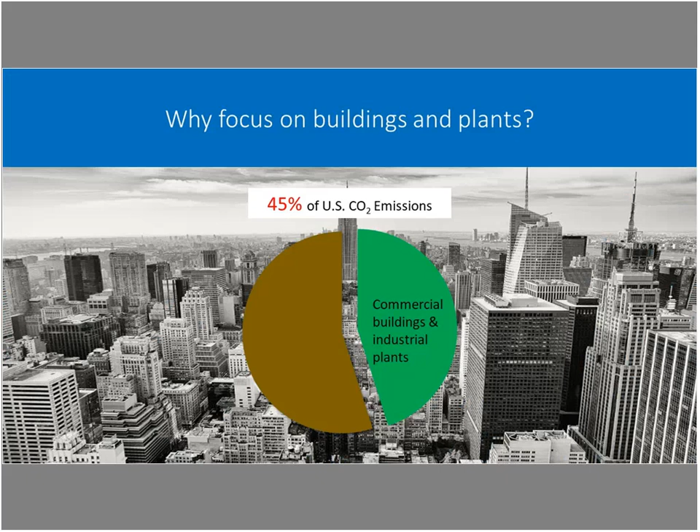And then if you go to the next slide, we also do this work because there is a lot of energy waste in buildings. So that suggests that there's room for improvement. And go to the next slide.

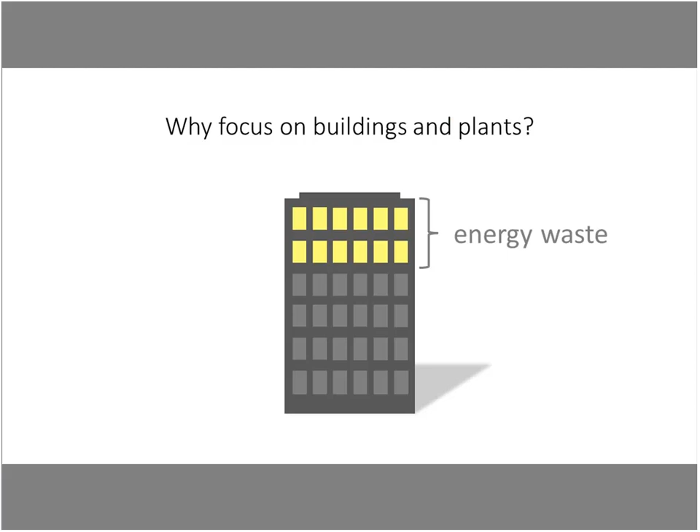And how do we support improvement? So there are 3 main ways as a voluntary program that we try to do that. Those include leadership commitment, so agreeing and engaging with our program, tools and resources to understand and act on energy use, and then recognition for top performance.

So that was it on the Energy Star background. And now we're going to shift gears into building performance standards.

The results of the poll are good to know, so I can try and frame things up for those of you less familiar with these policies or newer to them. So I'll be careful to really define things as well as I can.

So what is a building performance standard? With this slide, I'm going to compare BPS, the shorthand for Building Performance Standard, against benchmarking requirements, which are the predecessor policy to BPS. Those requirements applied to buildings, and they had to report energy use and water use to a state or local government, and then have that information disclosed publicly by the state or local government.

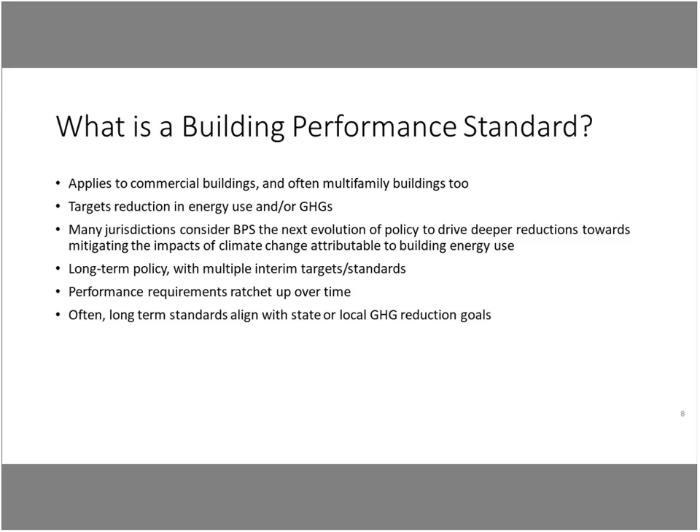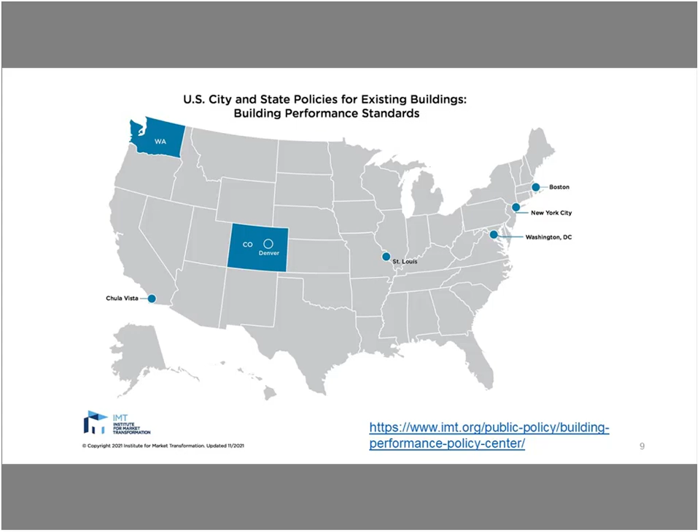Okay, now I want to talk a little bit about some differences among the policies that have passed to date. So among the BPS policies that I just showed, what are some key differences?

The next two slides after this are a long table that goes through all these things in more depth, some of these things. We'll get to see the specific application, but here are some differences in these BPS policies.

There are different sizes and types of buildings covered by the policies, and how properties are defined also differs in some jurisdictions. There are certain standards that buildings need to hit, both in the interim and long term, usually based on the property type. So how you define what type of property a given building is matters for that point.

The time frame also is a difference. Some places have a shorter time horizon, or more or less time between interim standards.

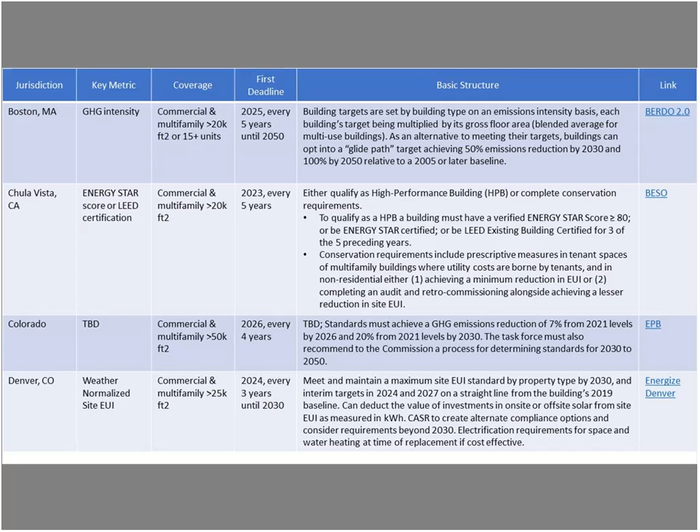Yeah, let's see what else. I'm going to move on, I think, in the interest of time - I know I'm already running a little late. So this is available to dig into, and we can ask questions at the end if you have any specifics.

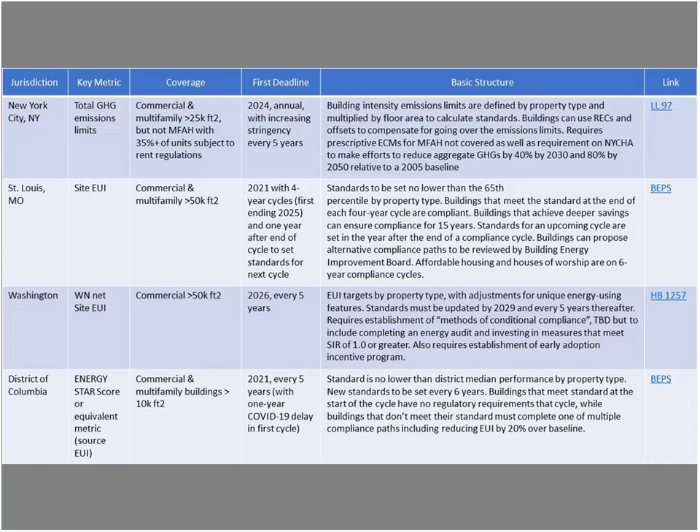So next slide, please. And next slide. The last thing I wanted to highlight was our role in these policies, and with the state and local governments passing them. We have an advisory role on policy design. We recently put out a toolkit that talks through guidance on these requirements, benchmarking, and building performance standards. We also put out a white paper that talks through metric selection for BPS. So both of those things are publicly available.

Another important thing, I think, overall is that we bring the perspective of building owners and managers to the table, to policymakers, and vice versa. So we're acting as a bridge between those two audiences. And one of the main things we are targeting there is consistency in these requirements across the country.

Because we think it will benefit everyone and make these policies more effective in achieving reductions, we also support policymakers on implementation when they're actually doing the work through our tool, Energy Star Portfolio Manager. That's the reporting platform for these laws. And we also have a forthcoming tool called the Building Emissions Calculator.

And the last thing I wanted to highlight was the toolkit that we have publicly available in case you wanted to learn more. It's broken into sections and talks about benchmarking and building performance standards, and it's targeting policymakers. So with that, I'm all done, and I'm looking forward to the Q&A.

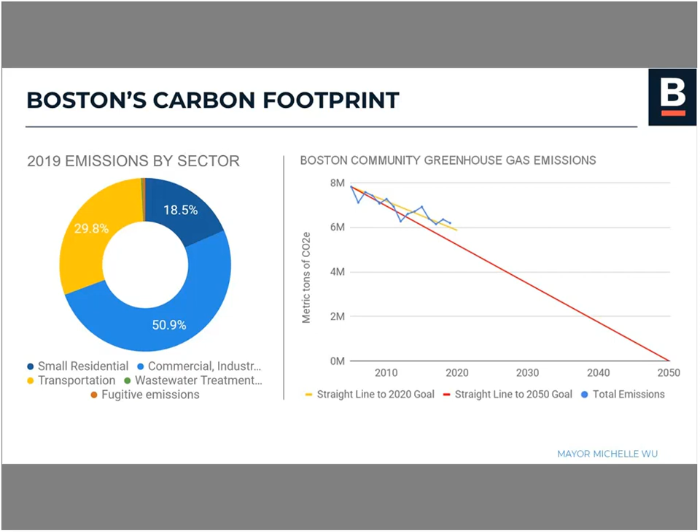In 2019, the City of Boston published an update to its climate action plan, which detailed how to accelerate climate action in the next 5 years. And one of the strategies that was identified as a high priority strategy was to develop a carbon emissions performance standard to decarbonize existing large buildings. So this was putting forward that Boston needed to develop a BPS as just one of the many high priority strategies within the climate action plan.

And in Boston, this idea was building on existing policy. So in 2013, Boston created the Building Energy Reporting and Disclosure Ordinance, BERDO 1.0. You'll notice there's a couple words different - instead of energy reporting, we now have emissions reduction. This was Boston's benchmarking policy, requiring buildings over 35,000 square feet or 35 units to report their annual energy and water usage to the city each year, and then the city would publicly disclose that information. There was also a requirement for every 5 years that buildings would need to complete an energy action or assessment.

So this was already in place, and then the climate action plan was calling for an update to this to turn it into a BPS with emissions reduction targets.

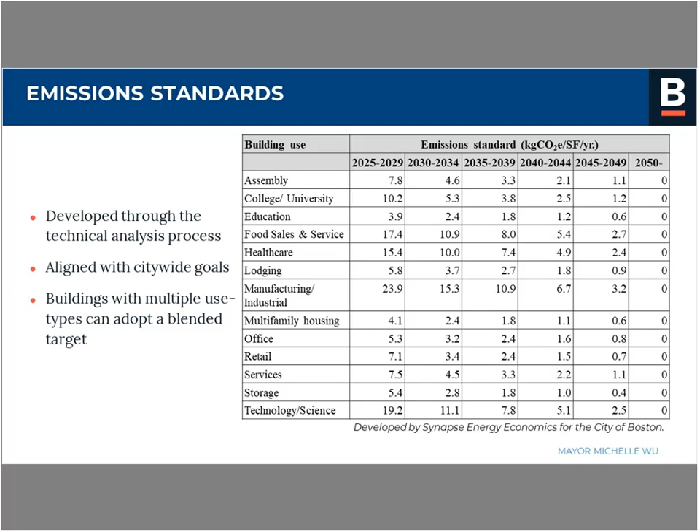Next slide. So I'll just cover a few key features of the ordinance. The first, buildings will still be required to report their annual energy and water usage, as they've been required to do since 2013.

The update expands the buildings that are covered by BERDO and subject to BERDO, and lowers the threshold down to 20,000 square feet for buildings with 15 or more units.

Buildings will have multiple pathways to meet the emission standards. So starting in 2025, that's when the larger buildings will need to first meet the emission standards. The 20,000 to 35,000 square feet buildings will have until 2030 to meet the emission standards for the first time. And I'll talk a little bit more about the different pathways to meet the emission standards in a moment.

And finally, BERDO will be overseen by a new review board. So this review board, we are still working on the regulations for that soon, and once that's established, it will have oversight over BERDO, as well as an equitable emissions investment fund, which I'll also speak about in a moment.

So within the ordinance, there are a number of flexibility measures written in for compliance with the emission standards. First is owners with more than one covered building—they can apply to comply across their portfolio. So this would allow building owners with multiple buildings to plan their investments over time and potentially reduce emissions significantly in one building and then make an investment in another building later on, balancing it out through a portfolio approach.

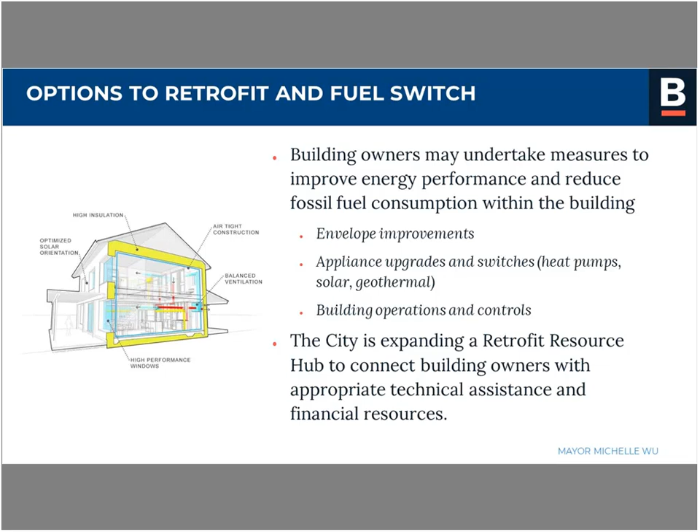Next slide. The second thing buildings can do is to purchase renewable energy to reduce their emissions and meet the emission standards. This could be either deploying renewable energy on site or purchasing renewable electricity that's generated off-site through Boston's Community Choice Electricity Program, Mass Class 1 RECs, or power purchase agreements.

Next slide. And finally, buildings that are still above their emission standard will have an option to make an alternative compliance payment to come into compliance with the emission standard. This alternative compliance payment cost is initially set at $234 per metric ton of CO2, and this is tied to the average retrofit cost per metric ton of CO2e.

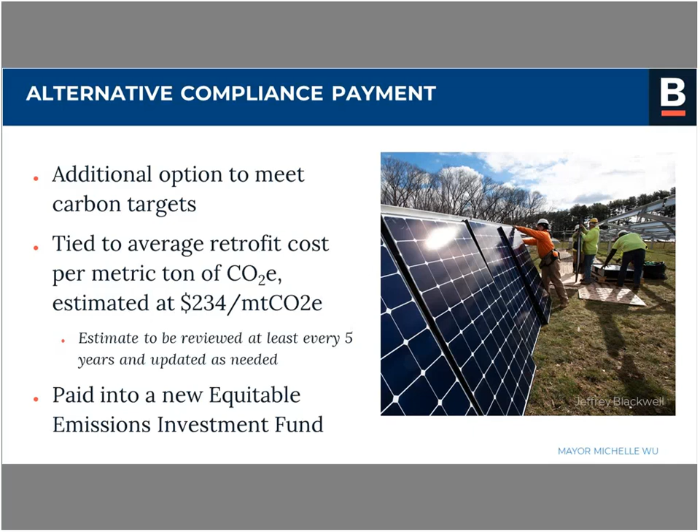The ACPs will be paid into an equitable emissions investment fund. This new fund will be dedicated to building emissions reduction projects that prioritize environmental justice populations and benefits, including affordable housing preservation and rent stabilization, air quality improvements, training and access to green jobs for residents, women, and people of color, and clean energy deployment. These funds will be allocated by the newly created review board.

Buildings subject to BERDO will have to self-certify their annual data submission and report their data every year. There's also a requirement for third-party verification every 5 years, including the first year of reporting. This year, 2022, is the first year this new ordinance is in effect, so all buildings reporting will need to get third-party verification of their data.

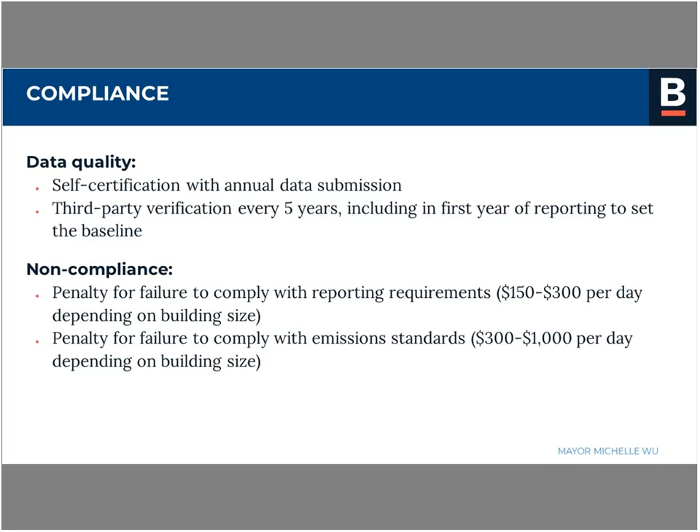There are some penalties for non-compliance. If a building fails to comply with the reporting requirements, they can see penalties between $150 and $300 per day. If they fail to comply with the emission standard, penalties would be between $300 and $1,000 per day. But I want to point out that if you're not complying with the emission standards, you can make an alternative compliance payment, which would likely be significantly less than paying the penalties for failing to come into compliance.

We're very busy in the Environment Department working on getting everything set up for implementing this new ordinance. We're in the middle of a regulations development process. We just drafted the first phase of regulations written to enable reporting in 2022, and we're currently in our first informal comment period for these phase 1 regulations. We'll have future phases of regulations development focused on compliance with emission standards, establishment of the review board, and other necessary topics. We're continuing ongoing stakeholder engagement throughout this process to hear from building owners and others involved in the building industry as we develop this program.

We're also committed to helping building owners comply and understand their obligations under BERDO, and pathways they can take to meet the emission standards. As mentioned before, we're continuing to expand our retrofit resource hub, which will provide additional resources for building owners. Lastly, if you're interested in learning more, please visit boston.gov/BERDO. We've got lots of information there, and we'll continue to update it as we develop regulations and reporting requirements. So that is it, and thank you very much.

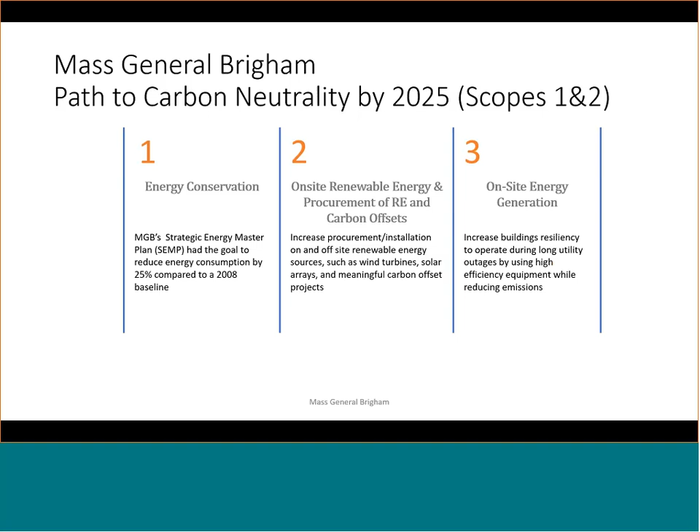And the third pillar, it might be counterintuitive, but it is on-site generation. I can go a little more into that detail later.

So in 2008, coincidentally with the enactment of the Green Communities Act, we started with the initial strategic energy master plan that included 10 of our largest hospital systems with the goal to reduce energy consumption 25% across the system.

I'm happy to report that we actually exceeded those goals, and we met that 25% reduction in 2019, and revised to reach a new goal of 40% energy reduction by 2025. We believe this can be obtained. One of our major hospitals has already reached 40% reduction, and we are learning from those experiences in doing energy conservation, what the obstacles were for some of the hospitals, to encourage and assist them in reaching 40% across the board.

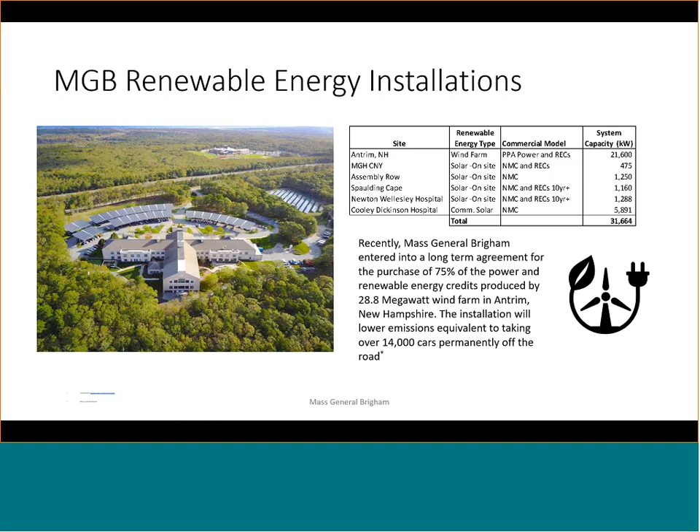Our motivation to do this is not only to help the transition to clean energy for the state, for New England, and hopefully the country as a whole, but also to allow others to take advantage of our purchasing power. For example, as many of you know, community solar requires an anchor customer for the project to be financed. That anchor customer can take up to 50% of the energy and credits from those installations, but this also allows the residential sector, and more importantly, low-income customers, to get access to renewable energy.

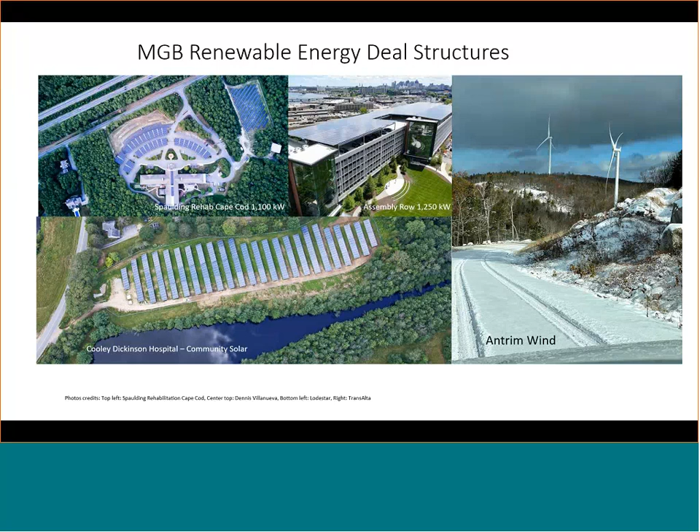We actually take physical possession of that power, so we use that power at our facilities, and also Tier 1 RECs. The third pillar, as I was explaining, is a little bit counterintuitive.

Our hospitals have an obligation to be resilient in our operations, especially in severe weather events where the utility can have long-term outages. So we must be able to operate for days or sometimes weeks, as happened in several storms like Katrina and Sandy, which we've seen in the newspapers, hospitals being evacuated because they didn't have the capacity to operate. So it's of great importance to us. There's also a bit of misconception that because this on-site generation uses natural gas, and today there's really no other fuel we can use, that these facilities increase emissions, which to us is not accurate.

Every megawatt hour you can generate on site efficiently, and a well-designed CHP works at 75–80% efficiency, would offset about 2 to 3 megawatts of upstream generation from plants with lower efficiency. Generators upstream can generate between 30–40%, and that's before transmission and distribution losses. So using the same fuel, we are more effective in lowering emissions per unit of energy, while also providing resiliency to our facilities. We have a combination of combined heat and power installations as well as fuel cells.

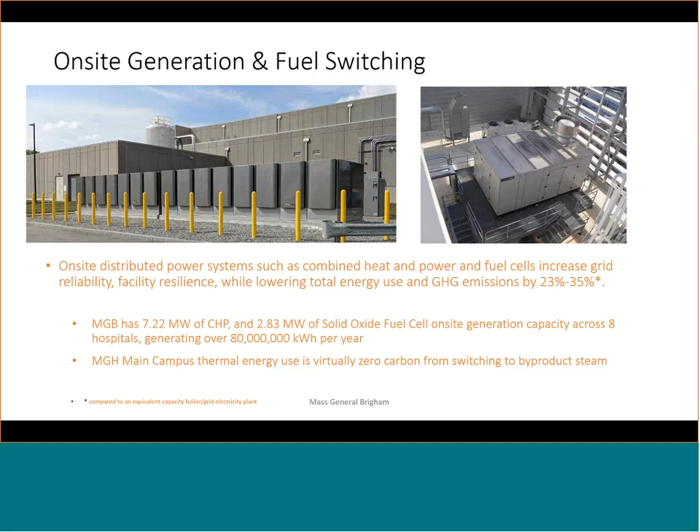One thing I want to mention that has also helped us reduce emissions is fuel switching. One thing not measured in what I'm going to show later, that we don't count in the reduction, is that originally we had several facilities running on oil number 6 and oil number 2. We converted all of those to natural gas. Also, our main campus for Mass General Hospital is almost zero emissions, very low emissions, due to clean steam. I know there's a question about that from the audience, and I'll address it in the Q&A section.

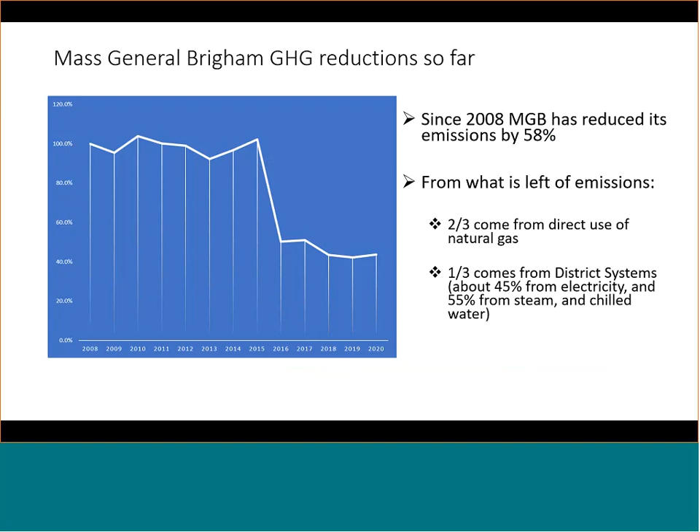So, results today: we have reduced almost 60% of emissions from our baseline in 2008. Of what's left, two-thirds come from direct use of natural gas at our facilities, mostly for CHP and boilers, and one-third comes from district systems. About 45% of that district system total, call it half and half, comes from electricity and the rest from steam and chilled water.

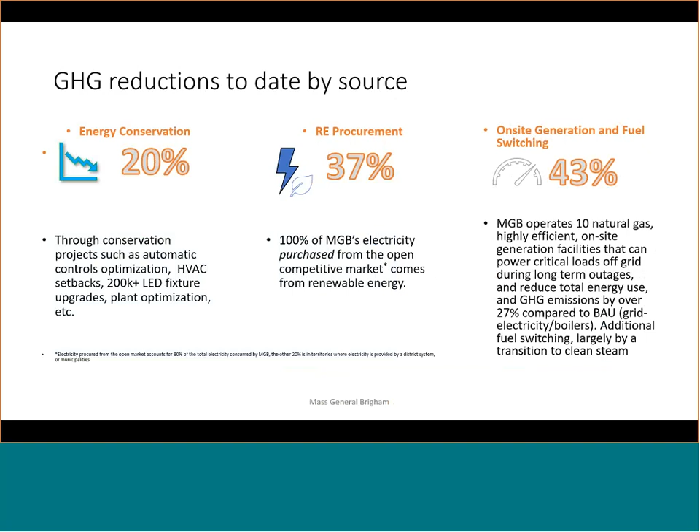This is the contribution each of those pillars has provided to the total reduction to date. Energy conservation accounts for about 20% of those reductions, renewable energy procurement and strategy for 37%, and on-site generation for 43%.

It's important to note that we calculate reductions differently than how it's generally done by some organizations or governmental entities. The actual reduction of emissions is not site emissions—it should be measured as the absolute reduction in source emissions. In other words, we are generating on site and displacing a lower efficiency generator upstream. So when we generate 1 megawatt downstream, we are actually reducing the output of a marginal unit that is typically gas, and today might even be coal, reducing those emissions upstream. That's an important clarification.

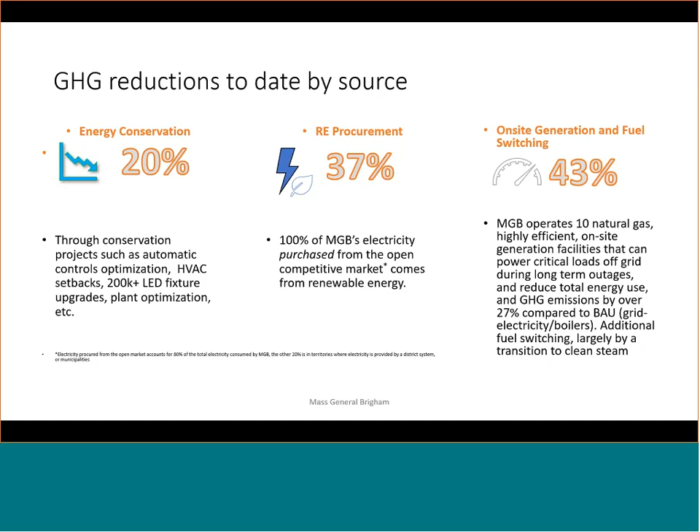Well, that's all for now, and I look forward to your questions.